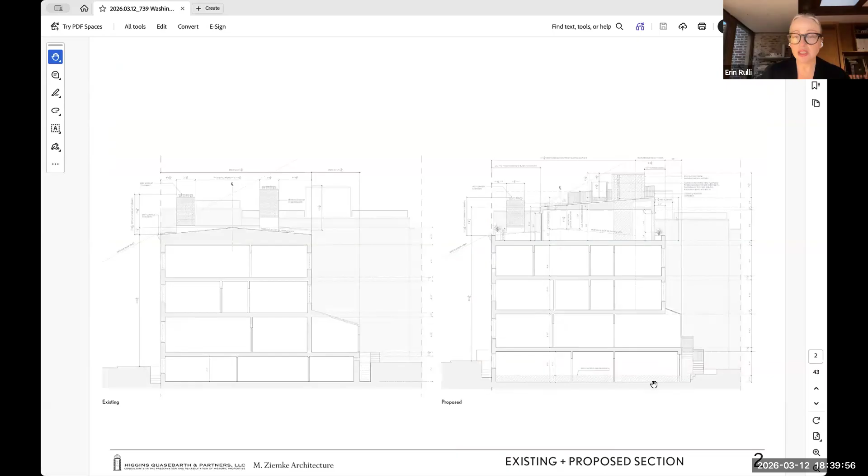And we are looking this evening at the proposed penthouse. There is a stair bulkhead and a mechanical enclosure as well, and rooftop railings, and then a rear yard extension that we're seeing here. There's also a small amount of excavation that includes a combination of underpinning and benching. So here are the context views, just looking down the street. This is, of course, the Whitney ISP currently, and this is 739 Washington. And then looking to the north, 739 is right here.

And I'm guessing, Chenault, that this is what you're talking about, the history of the development of the block. Yeah, do whatever's best there, but it's more an example of what the other things look like in the district. In the district, okay. Yeah.

So the existing house was constructed in 1845. It was one of a row of 4 that we see right here on the corner. And this whole corner was developed by the same owner. That included 129 Bank Street, which is slightly different and a little bit later, in 1855. And as you can see in this diagram and in the map, 739 and 737 were coplanar at the rear. And then because of the angles and the unique conditions in the block, there's a slight jog with the rest of the row.

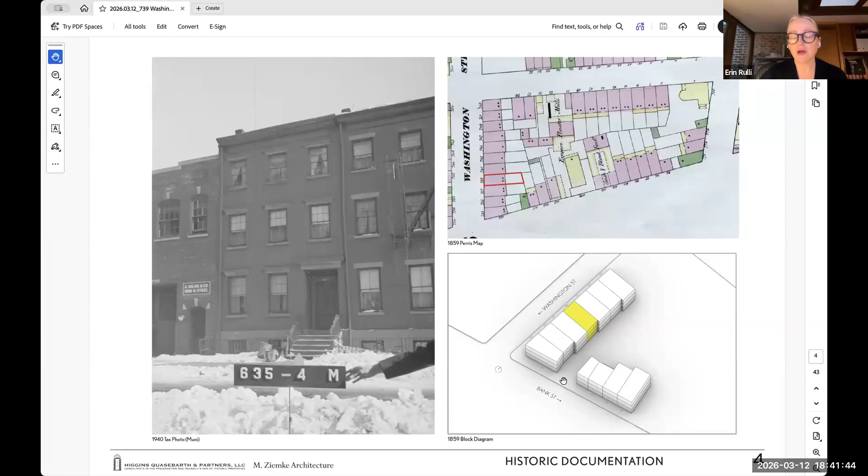And then this is a very typical Far West Village block where you have the mixed use with the row houses along Washington Street, and then the commercial or industrial development in the middle of the block. There was a plaster mill and a window factory in the mid block. So it's an irregular lot pattern and angles to this block specifically. And then there was always historically a break in the Bank Street frontage that afforded some amount of view into the mid block from Bank Street.

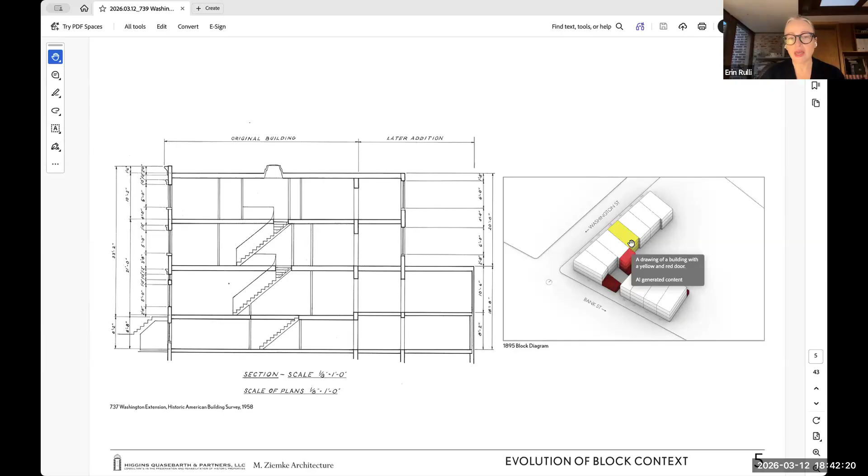Beginning in the mid 19th century, the block began to evolve and has resulted in a very irregular context for this house. The house adjacent to it, which was coplanar as part of its row, received a full height rear extension and two-story extension in the late 19th century, which exists today. And so this red massing is indicating that extension to the sister building to the south.

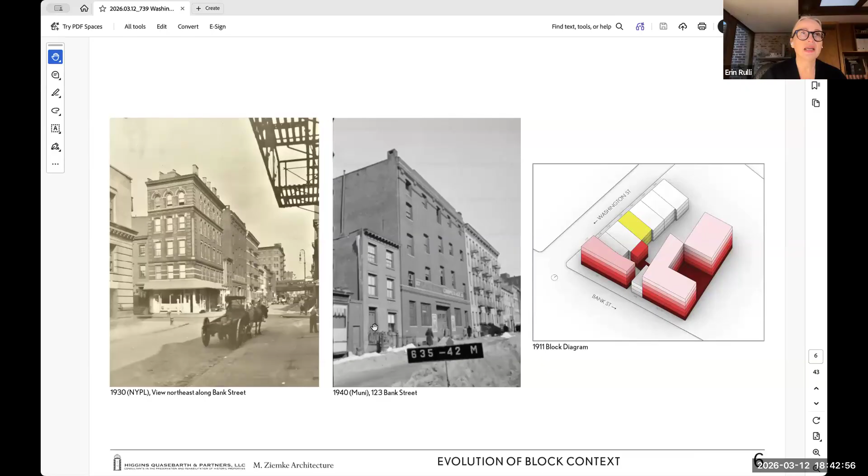And then in the late 19th century, 733 was replaced with a 5-story tenement, which we see here, and closed off some of that connection on Bank Street at that time. And then at 123 Bank Street, this 5-story cooperage was constructed, and you can see the impact of that on that corner block context. This is 129 Bank Street, which was part of that 1845, 1855 development of the corner.

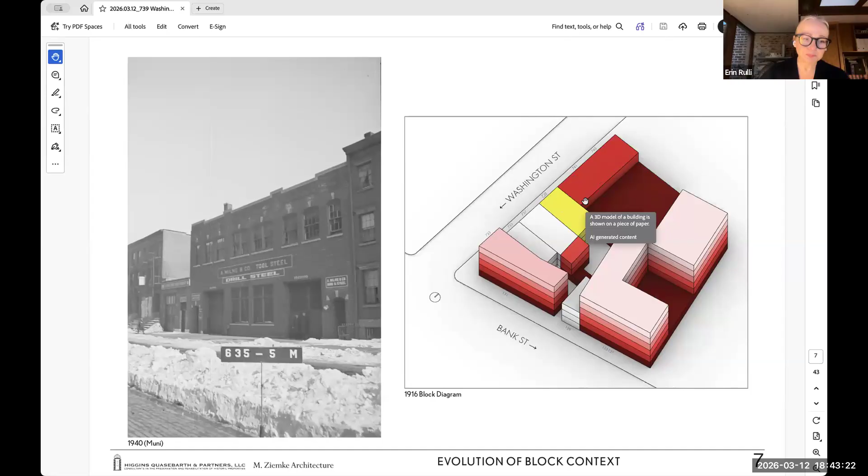And then in 1912, we have the construction of 745 Washington Street, which ends up being the Lichtenstein Studio building. Ultimately, that had a 1-story footprint over the whole lot, and then 2 stories at the front, I'm sorry, along Washington Street in its original construction. And then this is the condition today.

So of course, 745 has had a 3rd-story addition that extends all the way along the west side and along the south. So that entirely closes off the north side of 739. And then 737's full height extension that was 8+ feet that went back on the full height of that building. And that all just sort of locks in 739 between those two buildings.

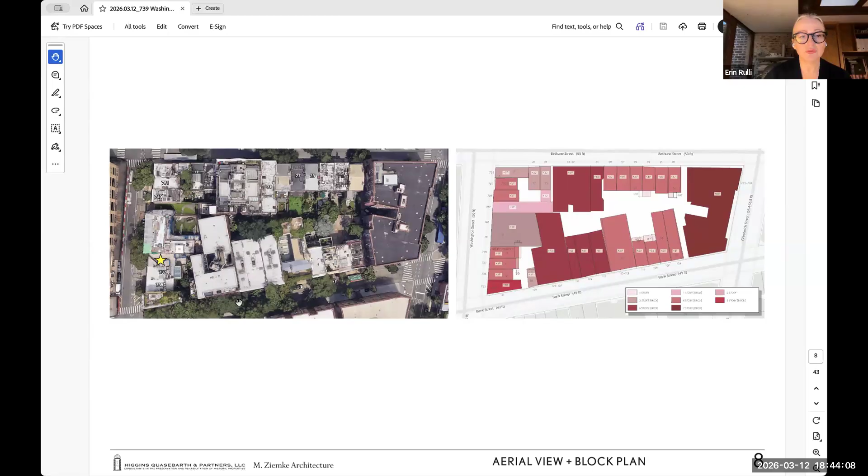And then, of course, the construction of the tenement on the corner. But you can also see just all of the density of construction all around the house itself. This is the existing condition. 739 is here. This 1-story kitchen extension greenhouse structure was added in 1990. We have 737 here, and this is the Whitney ISP building to the right.

Just a few views of the house today, conditions, and another view, 737 to our left, to the south, the existing rear yard, and then to the north, the Whitney ISP building. So the proposed scope of work is penthouse addition. You can see here, so at the rooftop, there's a planter box that goes right behind the cornice, a railing that extends behind that, and that allows us to push back the railing a little bit behind the planter box. The 1-story penthouse with its stair bulkhead and mechanical enclosure.

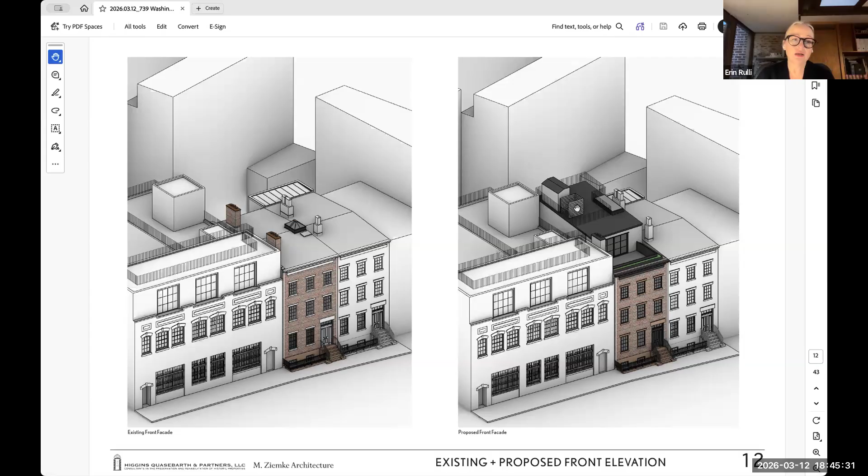So the stair bulkhead is required under code. You can't use a hatch here under current code. So it has to have a stair bulkhead, and mechanicals are required to be enclosed now with screening. So this is all sort of part of existing code requirements as part of the new project.

There's going to be facade restoration that'll all be managed at staff level. We have painting the windows. They'll have a dark finish, black, and the lintels will be restored with the Greek Revival profile. Currently, they're painted white and have been cut back. So they'll get a brownstone finish and their profiles restored, and then masonry repair and brick repointing as needed.

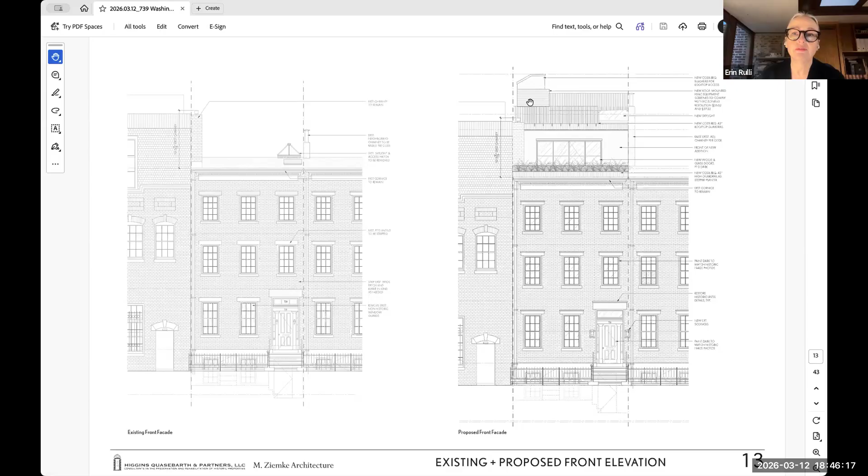Up at the rooftop, those elements that I just mentioned, the railing, the penthouse, and the stair bulkhead and mechanical enclosure. Here's the existing roof section, and then the proposed roof section. So we have the penthouse, it's set back 15 feet from the front facade. You can see the railing here with the integrated planter box. The height above the roof level will be 9'10" for the front of the penthouse. And then as we step back, we have the mechanical enclosure and stair bulkhead here.

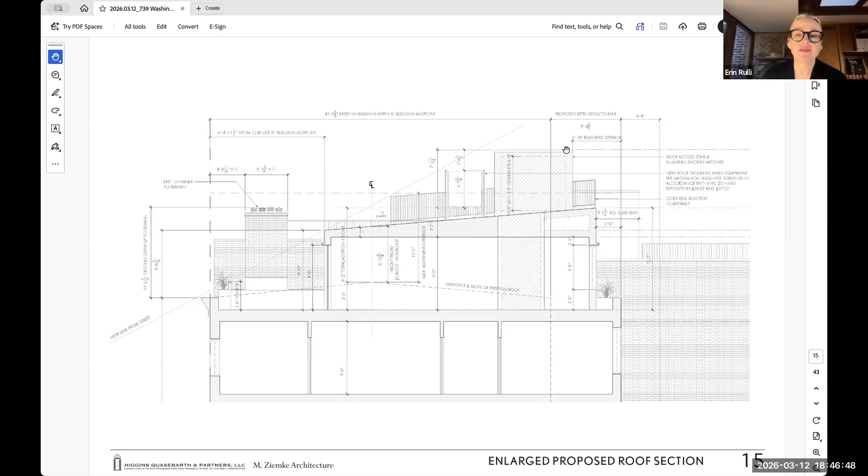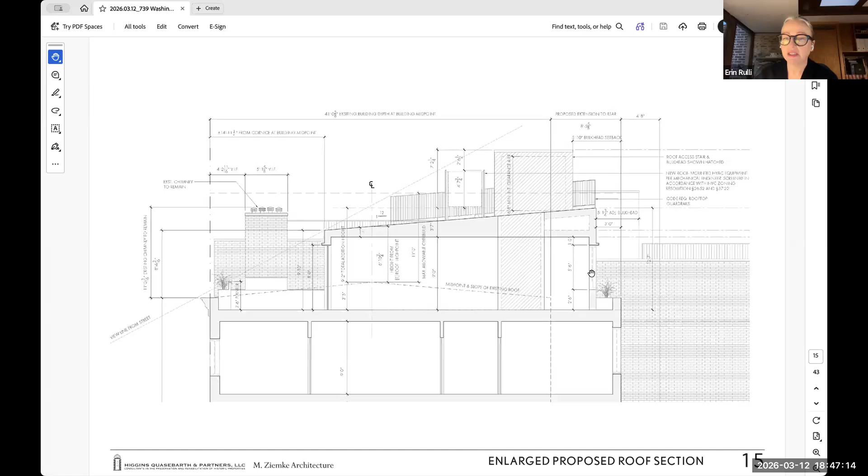At the rear, it's an 8.5-foot extension to match the existing depth of 737. And the penthouse will be set back 3 feet behind the new parapet line. So it's not going to be extending all the way back to the new rear wall. It sets back, and so you get 2 sort of separate readings of the massing elements. Here we see that in plan. So the setback to the front facade of the penthouse at 15 feet, the new mechanical enclosure and stair, and then the new parapet. This is the end of the penthouse, and we'll look at the rear conditions next.

So at the rear, proposed condition is to match the conditions of the existing brick facade and bring it out to the plane of 737. That's again about 8.5 feet, and matching the cornice line and the lintels of the existing building. It'll have all brick with punched openings on the upper 2 floors. The penthouse is set back those 3 feet. It'll have a warm gray stucco finish with sort of a glazed studio window opening. And then we see the mechanical enclosure and bulkhead at the roof level.

Extending out an additional 4 feet from the facade. Is that right? Let me confirm that dimension. Is that right, Marcus? Yeah, 4 feet. Yeah, I got lost in it for a second.

4 feet, this little greenhouse extension, which will then extend down to the basement level. So you can see currently the first floor comes down, steps down to the rear yard grade. 737's yard is excavated down to the basement level. And so we'll be matching that condition and creating a deeper rear yard for that sort of limited space behind the house.

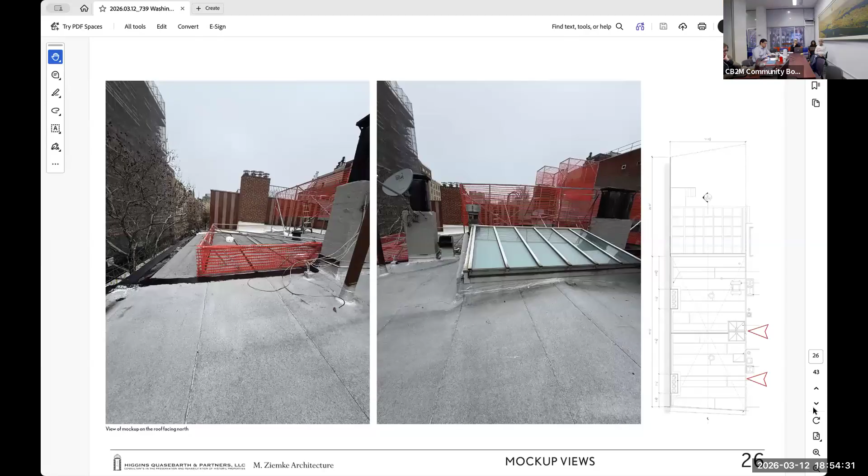So that is it. This is a photo of the reconstructed mock-up. The one you saw earlier was right behind the cornice. It was incorrectly placed, and the wall of the penthouse was 1 foot too close to the front facade. And here's just the material palette, the warm gray of the bulk of the new penthouse, black finish for doors and windows, and the new window installation for the rear facade. And that's it. Happy to answer any questions.

Okay, just a couple to get the notes in order. Is it fair to say that the front facade is intact apart from detailing that you're going to reproduce? Yes. And do we have an answer about the underpinning? Yeah, so it's 51 linear feet on one side and 18 feet on the other.

And if you could go to plate 24. This is from what vantage point? This is from Bank Street. There's a break in Bank Street. North or south of the building then? South of the building. Okay. So all the visibility is the south, and you've just progressed down. Exactly. From south to west to east. Yes, south of the building. Okay. And like everything else.

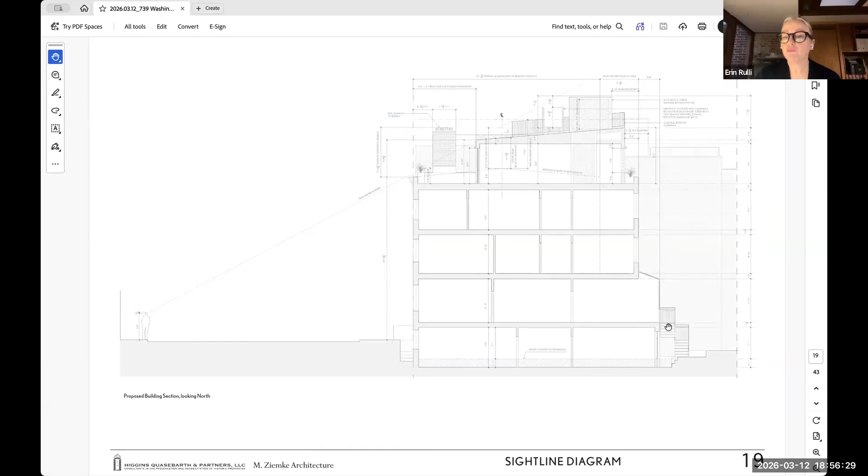At the rear, the garden is to be pretty much as it was, and you're just moving into it with the extension. Yes. So the excavation doesn't extend beyond the house itself? Beyond it does. Let's look at the axon. That's probably the clearest. Yeah, exactly. Just right there. And so how far is the excavation into the garden?

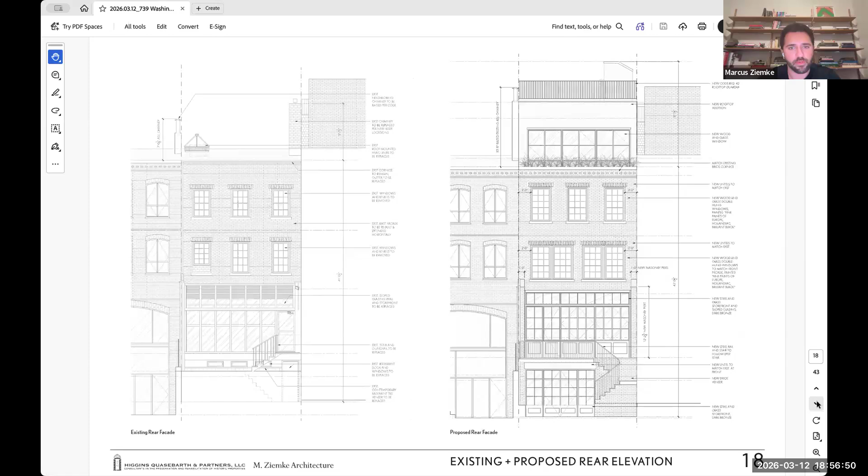That's not on the, I think our section line is cut in a different place. Let's see. And approximately? It's about 3.5 feet. Okay. And then it's 2 steps. It's about 3.5 feet, and then there's a small portion down to the basement doors, which is about 5.5 feet. Which is this, right?

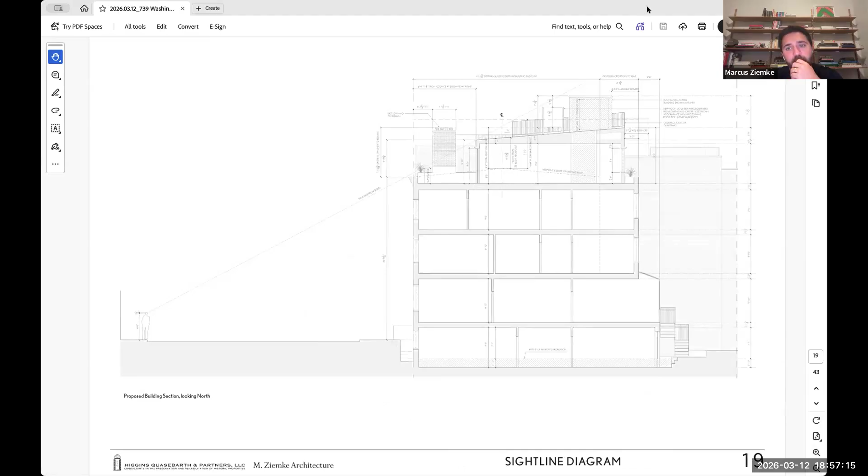And the delicate matter of underpinning doesn't enter into this then. Correct, because of the neighboring property that you can see in that axon. It's existing. We're matching the levels to the south. Okay. And so there's sufficient garden left. That's all. Thank you.

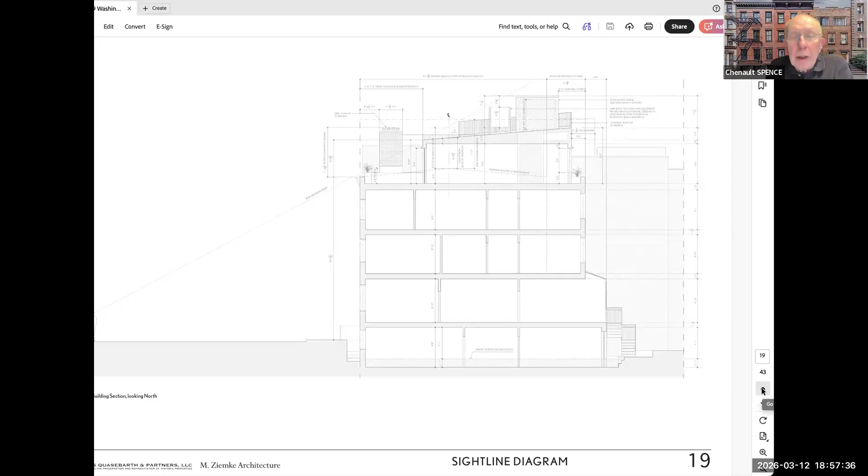We'll go around the committee. Brian? Well, okay, as far as my comments are concerned, certainly from across the street at Westbeth, I did not see much, but as you pointed out, there's a lot of visibility from the south angle. That's a little troublesome, but I think you've worked pretty hard to minimize that. And I'm sure that the planter box at the front will also help to soften that.

Could someone mute who seems to have a dog? Okay. How's that? No, there was some noise on the. Oh, yes, it's outside. Oh, I'm sorry.

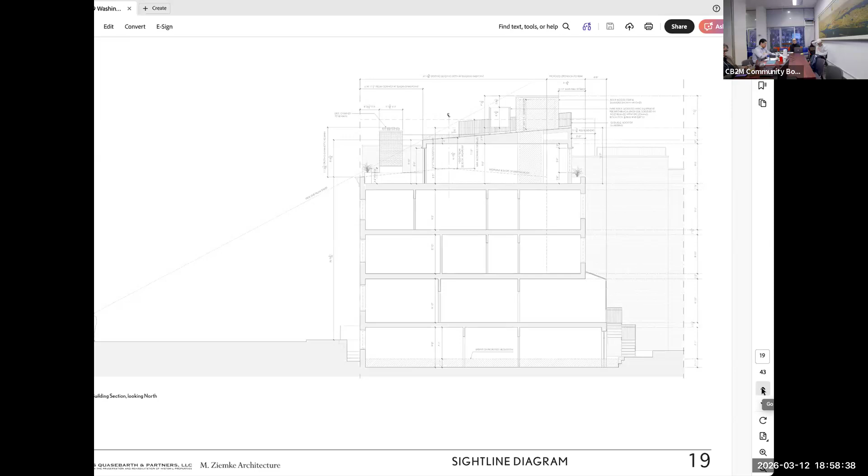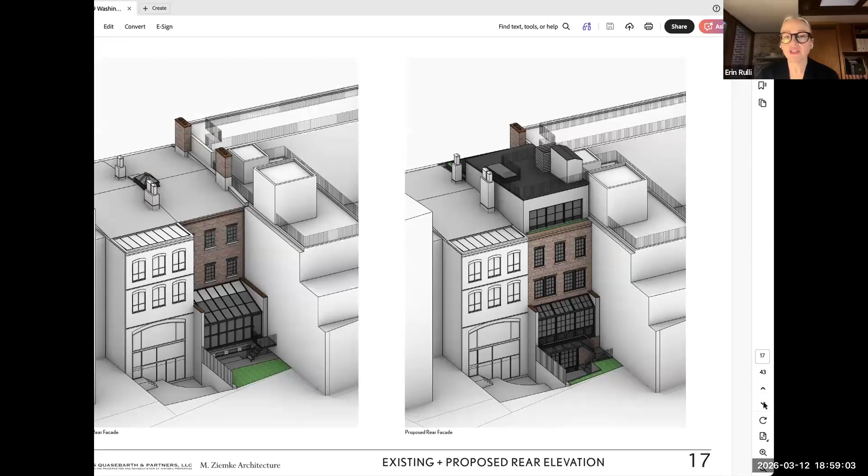Yeah, I guess there is an awful lot of visibility from the south, Bank Street and through that opening in the building. I'm not clear of what the materials are that are going to be visible. I believe you had a rendering of those exposure views. Yes, the penthouse has a gray stucco finish. So that would be kind of this massing. We have a sort of neutral gray stucco finish, and then this is a light gray screening. That's correct, Marcus?

And then the bulkhead is stucco. Yeah. Will be the same gray stucco, yes. So from this vantage point, we're seeing on the left-hand side, the lower section is gray against gray, and the bulkhead section is gray against brick. Yes.

And it's hard to tell in this view, but this bulkhead is on the north side of the addition, because it all gets kind of lost in the orange netting. That is on the north side. There's going to be a break and some differentiation up there in terms of planes, because this is looking from the back. That's this angle here. If it's okay, Brian, does anyone else want to talk about the visibility?

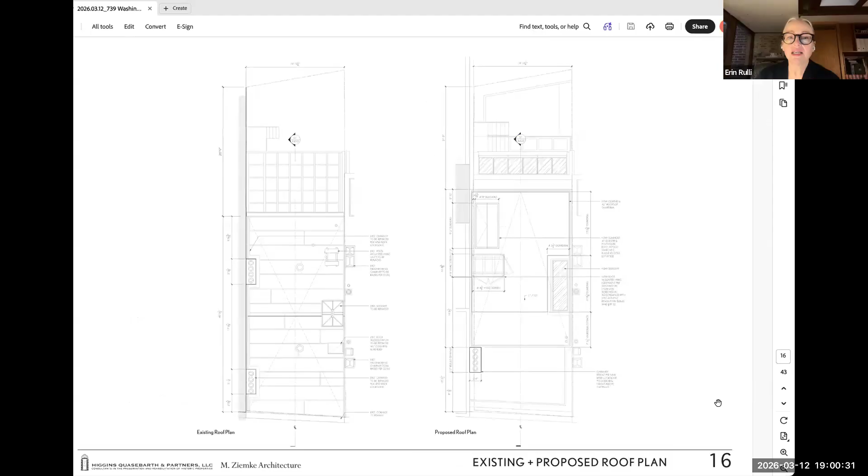Yeah, one question I have, can you remind me why you need the stairway bulkhead? It is a code requirement when it's considered a floor, anything that is more than 1/3 of the floor level below when you put an addition on. They now require you to have a continuous stair all the way up to the roof level, which is considered the roof of the penthouse, not the lower roof.

I don't know if you've seen this recently, but it's something with the new code, and it's been tripping up a lot of people because people think you can do a hatch, and then when they go through the DOB process, they find out they have to do a bulkhead, and they get sent back to landmarks because they didn't incorporate the bulkhead. So you're not allowed to do hatches anymore to the roof? Never, or only when there's an addition? When there's an addition or a substantial project, yes, correct.

Any other questions about that? I would just say that the standard is, in this area and with row houses, not more than minimally visible. Then we take from that, if it is more than minimally visible, to put it crudely, is it offensive? The way it lies, the way against the sky, against other buildings. So we'll consider all of that in determining whether the clearly more than minimally visible addition is as we would recommend.

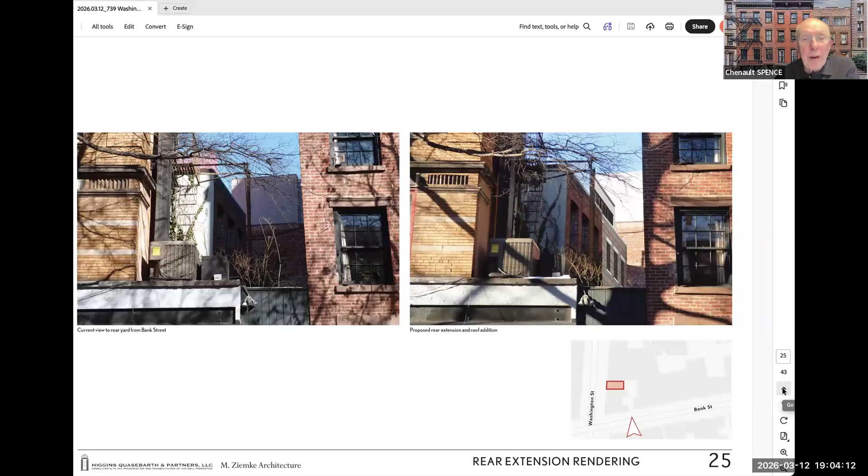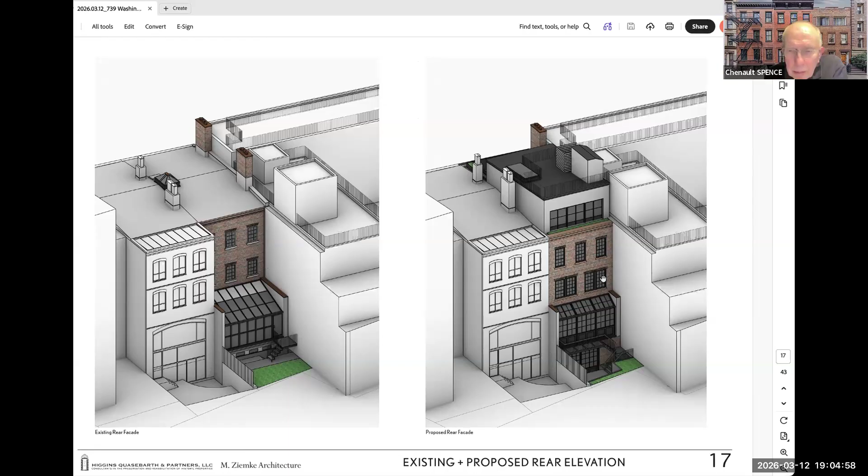Underneath that, are those multi-pane windows the ones that are not historic and shrunk in size? In the existing condition, Chenault, or in the proposed? In the proposed. In the proposed, they're multi-light, yes. And why two pairs? Have you elected not to use the same tripart pattern? It really has to do with interior planning, to be able to create two occupiable rooms there with light and air for those two spaces.

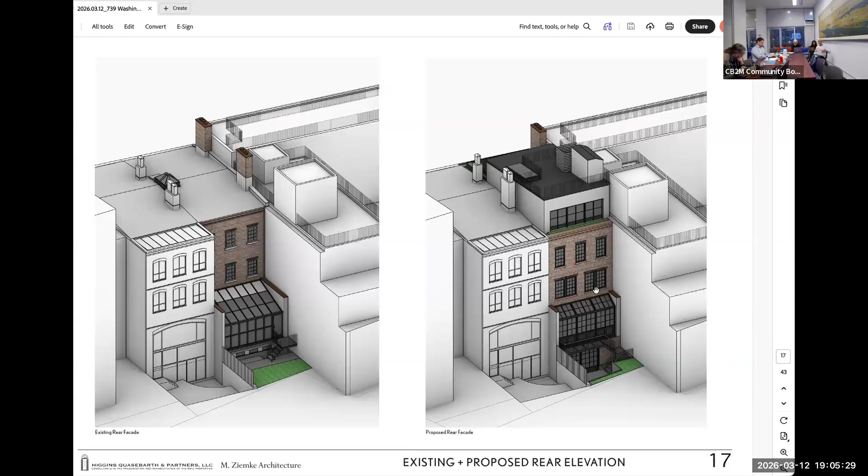Okay. The existing windows, have they been replaced over the years? They have, yes. They're 1990s replacements. But the openings are the same. The openings, yeah, for the most part. There's one where the lintels have been reconstructed. That's very obvious. And then it looks like there used to be a door here, and that's been infilled. I believe they demolished something that was here to build this greenhouse, this extension, and there was a door that used to lead out to the roof of that structure previously.

Not originally, but previously. There's steel casement windows now? In the proposed? Existing. No. These on the brick punched openings, those are wood double-hung. Oh. Yeah. And these are aluminum, not good construction. In a very technical term. Yeah. Is that all the questions?

Okay, and are there members of the public who wish to speak? Are there board members here? I don't see any. Okay. I have a question, actually. It's really not to do with the landmarks. Why are you bothering to excavate down to the cellar level? You're going to be losing backyard. Yeah, the priority for the client here is trying to get more light down to the basement rooms. They're going to be occupiable spaces, so they want to make them feel as comfortable as possible. So that's about maximizing natural light and access. Okay, thanks.

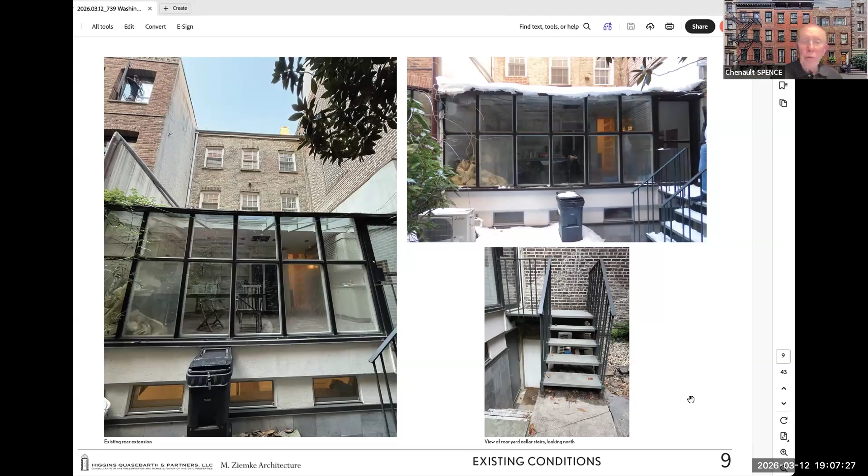Okay, thank you, and thank you, everyone. We'll move on to the next application. Thank you. Brian or Eugene, whoever's managing it now, it's on for 739 Washington Street, if you would bring up the people. We're closing up 739 Washington and going to 60 Bank Street. I'm sorry, I'm rereading this. Bank Street then. Yes, so could the presenters for Bank Street raise their hand and I'll elevate you to present, okay? With Edward Bowser.

Okay, the application is for 60 Bank Street to restore the front facade, construct a small rooftop addition, rebuild an existing rear yard extension with new windows patterns, and excavate the rear yard.

Where's the share? Okay. Oh, let me ask you again. I said it, I think, when you were not on, perhaps. There are a number of pages that have small, sort of like that one. And if you have something particular to show, just enlarge the one you're speaking of. There seemed to be an enormous number of comparisons in the district, and just be selective with maybe a few of any one topic. Sure. We know the district well and generally what fits with what houses, so it'll be okay. Thank you. Can you hear? You guys can hear me?

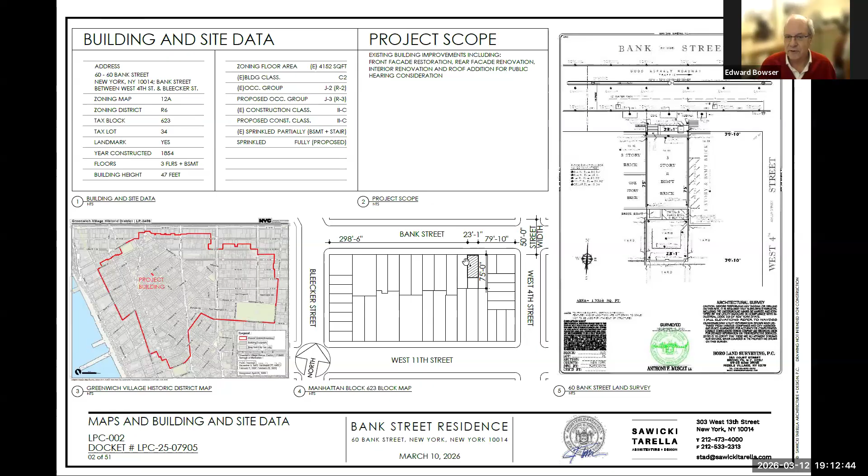I think we'll try the next slide just to see. So this is the district. This is the lot, and this is where it is on Bank Street. It's between West 4th and Bleecker, closer to West 4th on the south side of the street. And the building directly to our east was already fully renovated, and many buildings on this block have been renovated extensively. Let's go to the next.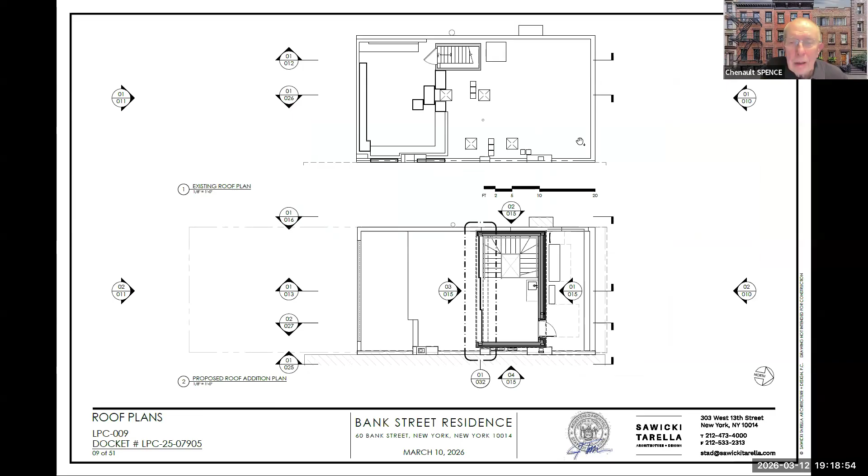Have we seen a representation of the rooftop addition? Did I miss it altogether? As far as what it is? We just showed you a plan, right? We went over that. So, I mean, what does it look like? Oh, it's a box, and it's clad in standing seam zinc. But you don't have a rendering or anything of it, or an elevation? Well, this is the front elevation of it. And is that solid? It's mostly solid. Is that a full window wall we're seeing?

It's got a door coming out for servicing air conditioning. And is that a window, a full height window? I can't tell what we're seeing. No, it's just a door. It's just a service door. Is there no window in the front? No, not facing towards the street. No, the windows strictly face the back. I can't figure out from that. Just a moment. Let me get these, and then Sean.

The excavation, yes. Is there excavation under the house itself? Want me to go to the section? There is some clearing of different levels of existing floor in the cellar that we're hoping to level out, and we have a little bit of underpinning to do. Okay, let's start with the excavation. How deep is the excavation below the house? Below the house is 2 feet. Anything interior to the house? Oh, about 2 feet.

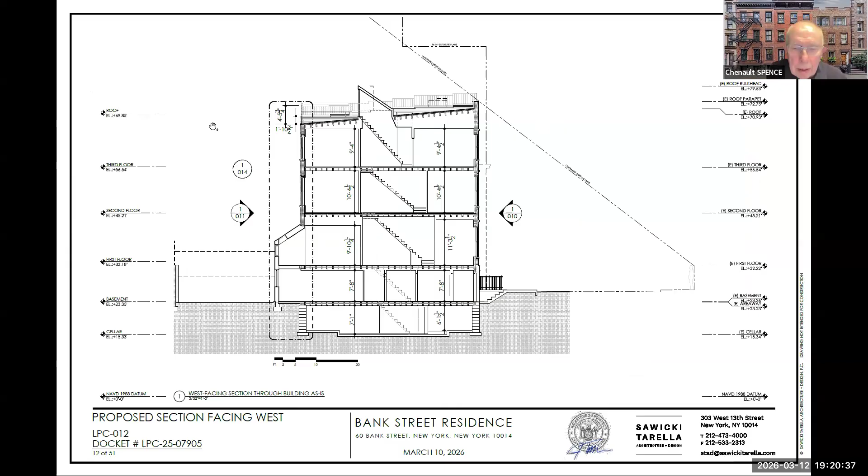We go to a section. And can you show us on a plan the underpinning? Yes, sure, where it is. Here we go. So on the west wall, where the elevator and this area are, it's about 15 feet of underpinning in the mid wall. And in the rear, on this wall, about 10 feet of underpinning.

And is that all adjacent to an existing structure next door? Yes. And this excavation extends under the extension. Yes. And then how far beyond the extension into the garden is the underpinning and the excavation? The extension is about 6 feet beyond the back of the original building, and that's as far as we're going.

And you mentioned excavation under the garden. Yes, this white box here in the back. What are the dimensions of it? That's about 18 feet square. So how far into the garden? About 18 feet beyond the existing footprint. Oh, so it's 18 by 18. Yeah, the plot is 23. Oh, so it's just short. We're inboard a few feet on each side and 5 feet in the back.

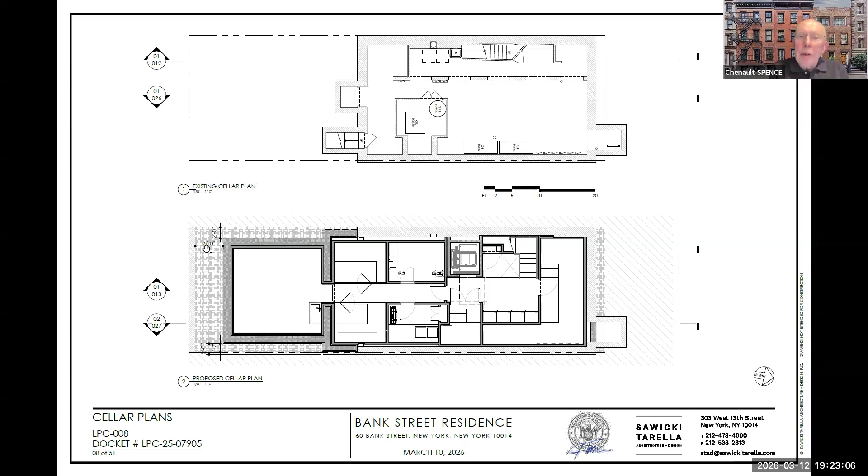Oh, you mentioned particularly the gate. Is that something for us to speak of that staff didn't do? The staff wants us to present it at public hearing. They were not willing to give us the gate at staff level. I'm sorry, it is or is not something for us to speak about? It is. I wanted to mention it to you in case there is some concern at the community board level as well. Okay. We routinely see this, usually for a ramp, so I don't think that is a question, but we'll discuss it. Okay, are there questions from the committee?

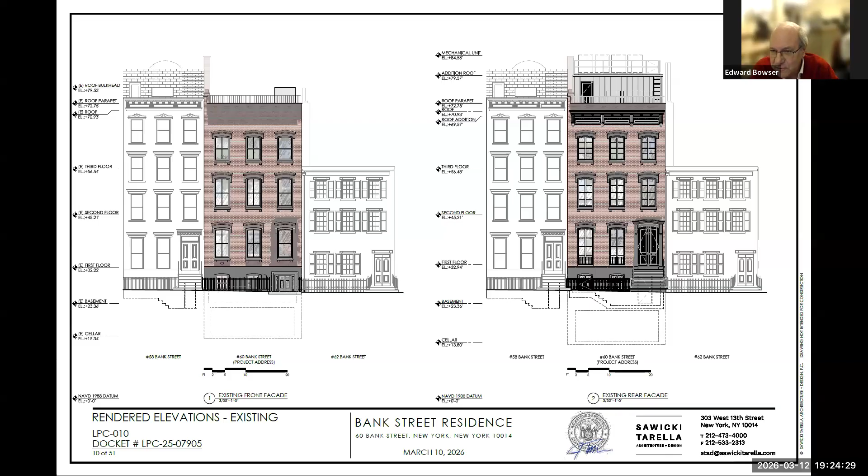Oh, lots. Go ahead, Arturo is going to start. Maybe this is mislabeled, or maybe I'm misunderstanding. On this page it says existing front facade and existing rear facade. Are those the correct labels, or is it the proposed front facade? Oh, it's the proposed. We've been shuffling the pages so much with landmarks in the last week that the label got missed. It's good that you caught it because we'd like to fix it. This is the proposed new facade. And same thing for the next page, I think you also mislabeled rear. Yes, this is the existing rear facade, and this is the proposed rear facade. Okay, thank you for the clarification.

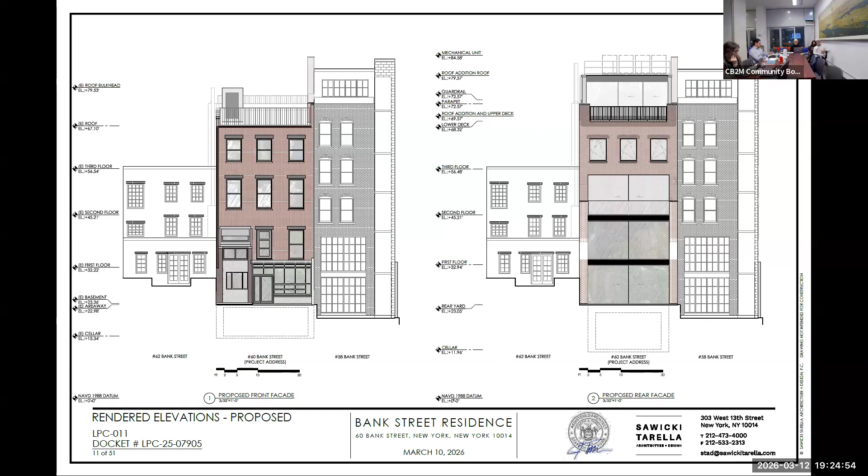No problem. Okay, so I would like to ask if we have some documentation about where the cornice is on the original building, because the proposed cornice on the front facade just seems out of place. So what went into the decision to put the cornice where it is on your rendering? Well, we placed it relative to the photo, at the level relative to the windows where it was originally, rather than all the way at the top, which would have left us with a much larger gap between the window and the cornice.

And we thought it better to not cut the top off, because there's a steeply sloping roof, which we are not interfering with. We'll show you that in section. But starting where the facade was, this was the original brick, it kind of ends somewhere in that area. And that was where we thought was the best place to place the cornice.

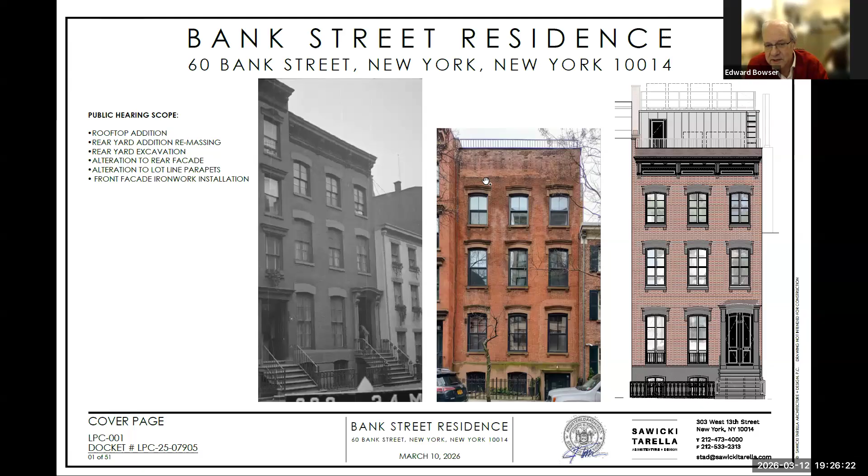Okay, so you're saying that you don't have any better photographs than the one you're showing to give us a better indication of the true extent of the original cornice? No, we have all the photos. Maybe the next one. We have all the historic pictures of the building that we've been able to find. These up here at the top, but you really can't see much more, and it's dark.

Okay. Is there a stoop gate as part of this presentation? Yes. Oh, wait, it's stoop gate? Oh, no. Wait, you mean on the stoop? Yes. No. All right, thank you. Then,

I'm just going to offer something to you: the visibility is so great for this addition on the roof. And it's partly because you've chosen to do a relatively small room running all the way across the building, as opposed to maybe that same footprint over on the other side of the building, so it's not so much sticking out like a sore thumb.

And so since you have already indicated to us that the interior is totally reworked, I'm assuming that locating the stairway is something that was within your purview. So I would say, have you considered that addition being less visible?

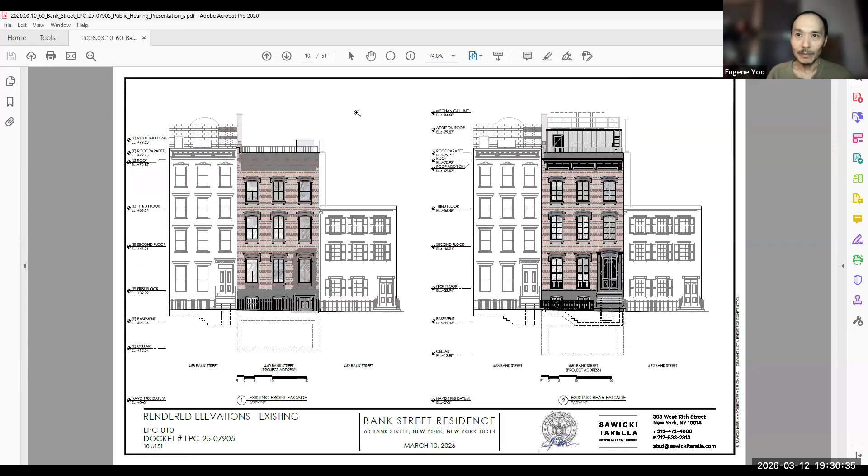Chenault, I have some questions. So if you could go back to the front elevation, I don't know if I missed this, but did you describe the windows? It looks like the windows are much different in the existing and the proposed. Is that part of the application before us? Well, not really. The windows that are currently existing are replacement windows that were done in maybe the 60s or 70s. The windows we're proposing are as close to what was in the historic photos as we can determine so far. We've been going through the profiles and the brick molds and everything else with Landmarks, and they seem satisfied with what we're providing.

And I'm just very curious, since you have this on the next slide, I realize this is invisible from the street, but what exactly is going on with the windows in the rear? Well, the rear is quite a mess, but that's a different question. The interior of the building has been redesigned by a pretty famous Italian designer, in sort of a mid-century modern world, and their intention was to carry that out to the back of the building as much as possible.

Do you want to have your question, Chenault, or? Yeah, go ahead. Oh, okay. My two other questions were, one, do you have any pictures of the mock-up, or is it just that one photograph very early in the presentation? No, we have pictures of it. You mean like up where it is, as opposed to seeing it from the street? Sure. Yes. Yeah, I think they're in the appendix. Okay. Yeah, but of course.

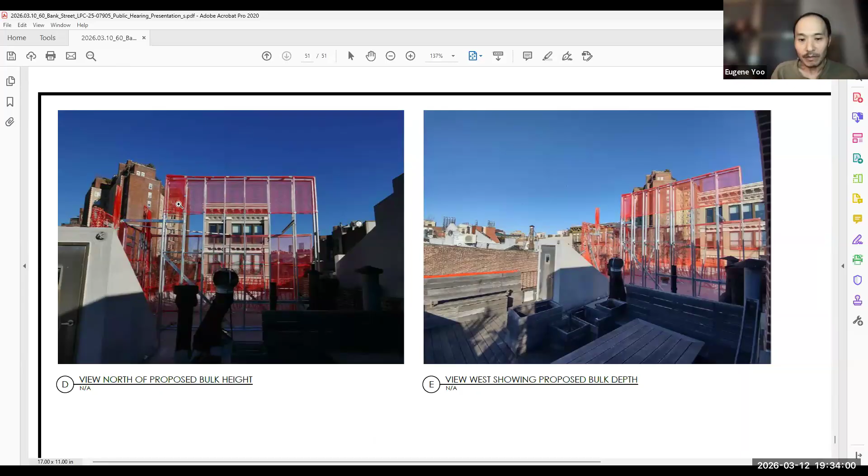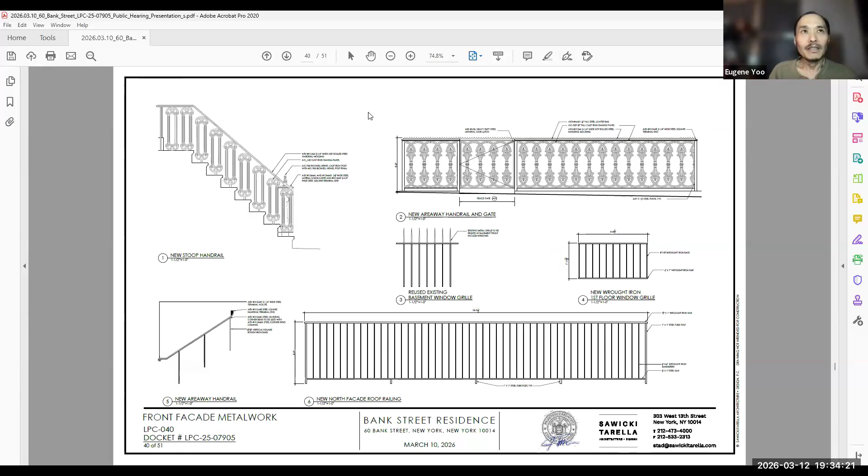Yeah. So this is what we built. We built only the two walls that you can see from the street. So this is the front wall, and coming back, this is the side wall. And the higher piece on top is actually a representation of some of the air conditioning units that are going to be on top of the pop-up. The mechanicals? Yeah. Okay. And regarding the gate, or I guess the front of the building, are there any details of the proposed changes to the gate? This is the panel. It's just a little hard to tell from the one photograph that is in there. Yeah, this is close up more of what we're proposing.

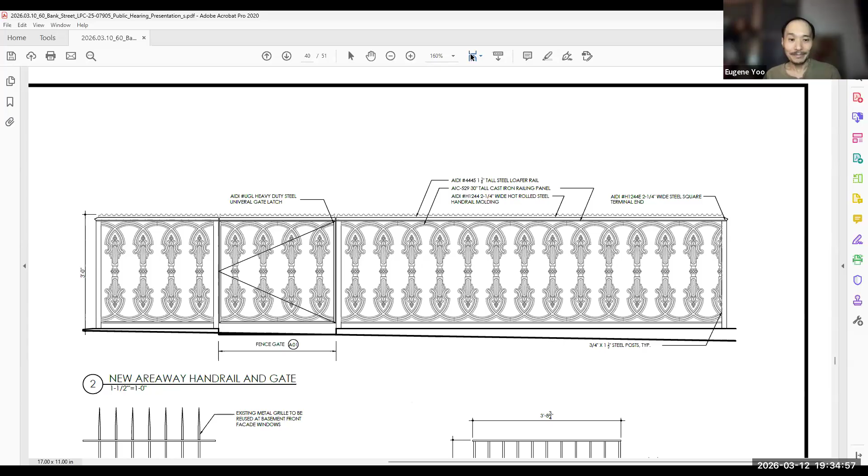Are there similar ones in the neighborhood or with similar buildings? This attached photo. Yes, they're both similar to other ones in the neighborhood, and as close as we could find to matching the tax photo of the actual original pattern. Are you finished, Eugene? I am. Thank you, Chenault. Could you go back to the rear elevation? I'm sorry, I should wait. Are there other members of the committee that want to ask questions? Well, I just want to ask if there's a photo of the existing rear facade. Yes.

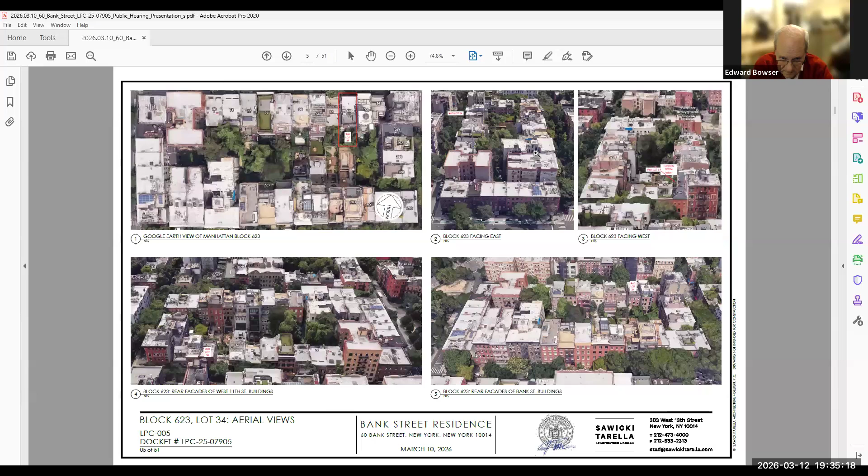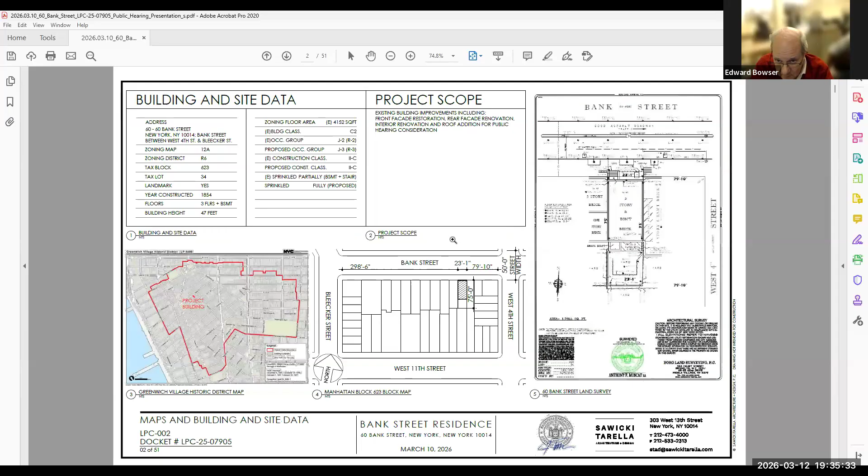Okay. Yes, I think there's a better photo here. The photo. Isn't that it? Yes. That's what the rear facade looks like right now. Number 5. Do you want to say something about it? What do you think, Bo? So that's an extension on the ground level, right? Correct. Two levels, actually.

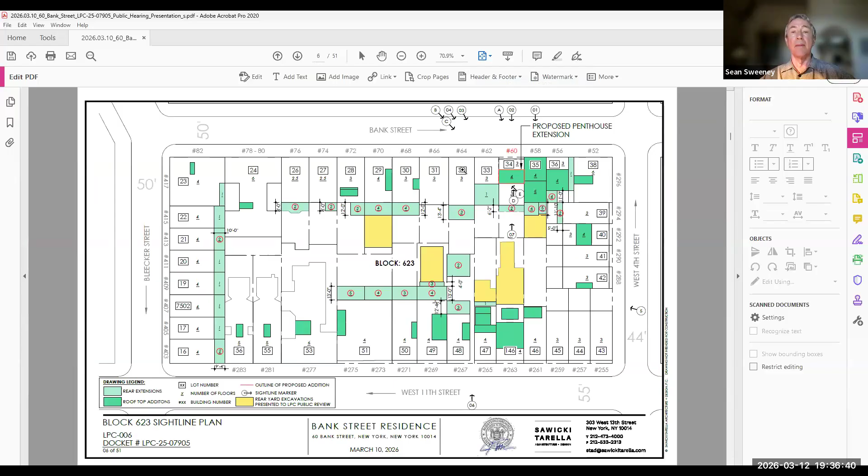Other questions? Yeah. It looks like in the proposal, you're going to have more panes or lights of windows on the front facade than existing. I think there were 4, and now you're going to have 8 per window. Why are you doing that? That was requested by Landmarks to match the tax photo. Okay.

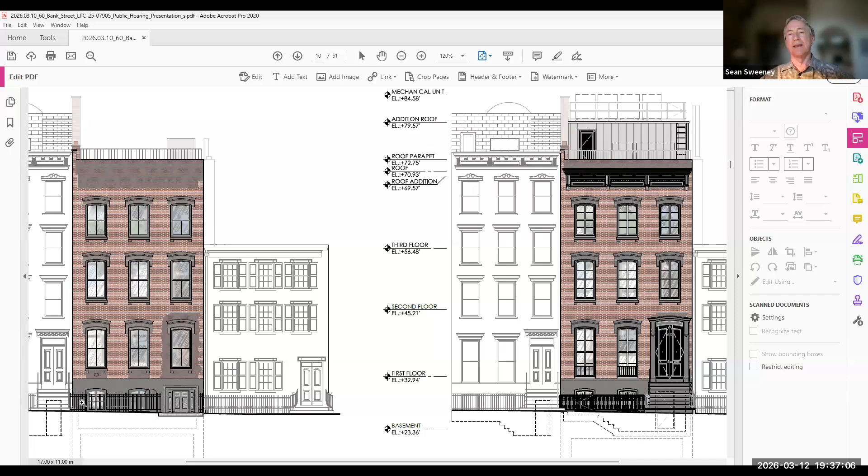I think our clients would prefer the other one as well. I agree with you. Just because the tax photo has it doesn't mean it's historical. Doesn't look very historical. True. Well, the staff are approving this based on the historical material. Also in 1850, the technology to make bigger panes of glass probably didn't exist. So it's conceivable they were smaller panes.

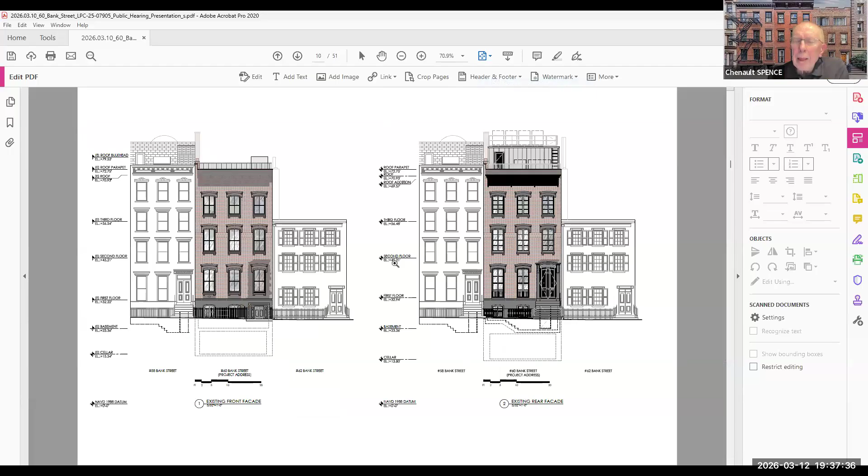Okay, could you go back to the photograph of the rear facade that you showed? Now, we're looking at the original back wall and the original window openings, and the windows, of course, are going to be replaced. And what are we seeing underneath the leaves? It sort of gets vague. There's doors that have been cut into a balcony. There's replacement bricks, stucco. So that's been considerably altered, but the two floors above have not been altered then. They have not. So there's a lot of original material coming out in order to make these windows.

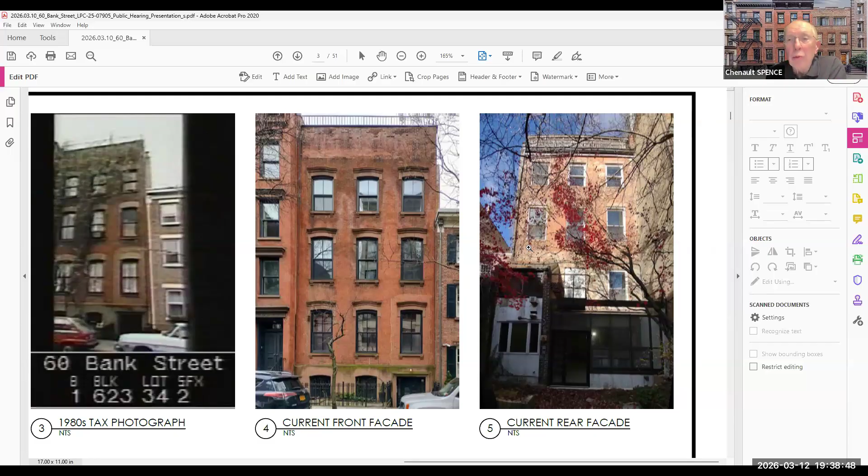If you go to the rendering, please. Yes. We'd like to save some of those bricks because several of the walls have really some structural problems that we're going to need to fix both on the side and up above. Okay.

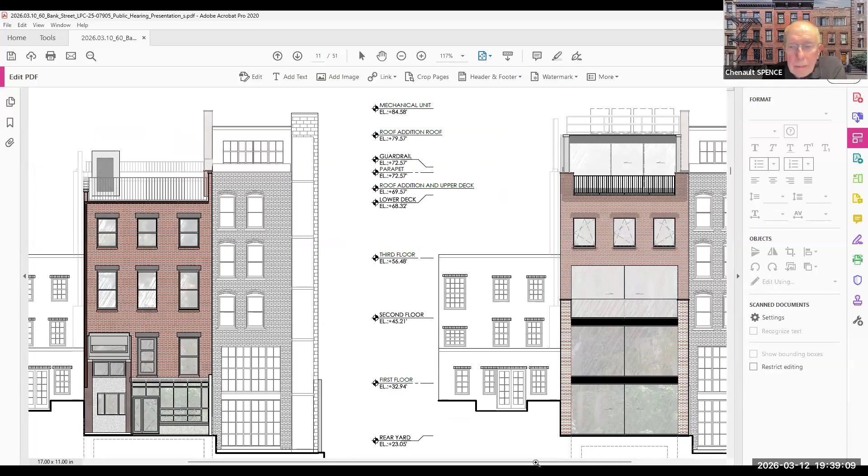Now, it's hard to know exactly what we're looking at here. Is this really just plain glass, as ultra modern as it looks? Yeah, those are sliding. The bottom one is a slider. The top one is fixed, and that one is a slider. So that's pretty much half the width of the house, a piece of glass sliding. Yes. And the only distinction is the edge of the glass itself. Yes. Okay.

Eugene, are you able to show these in the business session? I have the presentation that was sent to us, so yeah, we can bring this back up in the business session. Okay, good. Fine. Are there any other questions?

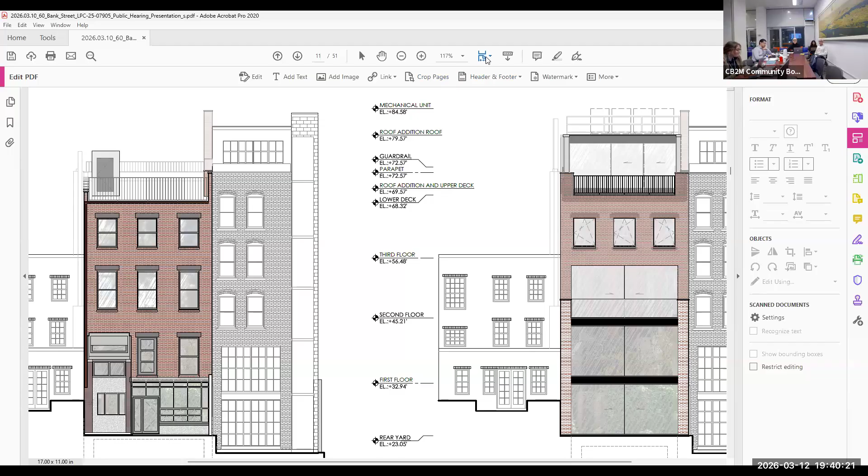Yes, this is Brian, and I do have one other clarification in case the presenter is not here during our business session. I noticed that in the details and on your floor plans, there's quite a bit of steel in the floors, so probably for getting a stronger structure for your floors. And the stair is totally reconstructed. It's not in the original place of the original stair.

Correct. The stair that's in there now is not the original stair either. It was installed when that was converted to a multiple dwelling. Okay. All right, so I'm going to be arguing for other solutions that will keep the addition on the roof from being so visible. So I just had to clarify that.

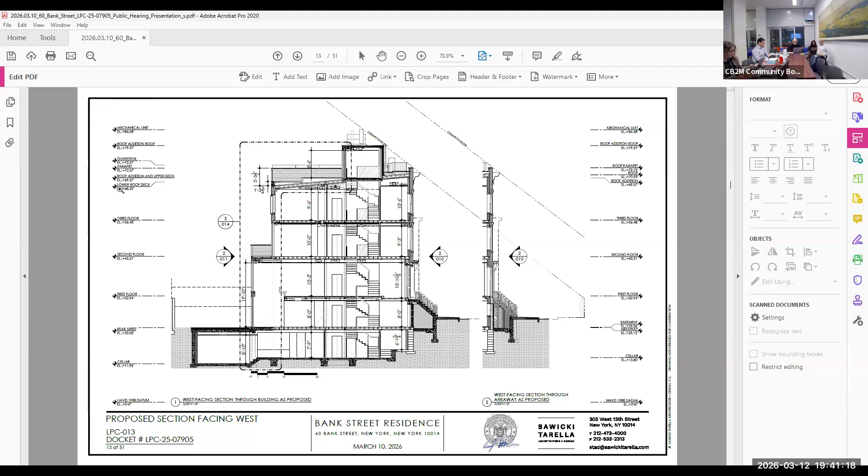Sure. I have a question, Chenault. So there had been 8 tenants there. Do you know how many will be there now? Will this be a one-family house? One family house. Thank you.

I'd like to say something about the rear facade. The commission, in the olden days, seemed not so concerned with it. Now they're treating their view of the rear facade equally to the front as part of the house and the way the house looks. So while this visible from a thoroughfare theory has to do with rooftop additions, the fact that the rear facade is not visible except within the donut doesn't discount it from being carefully considered.

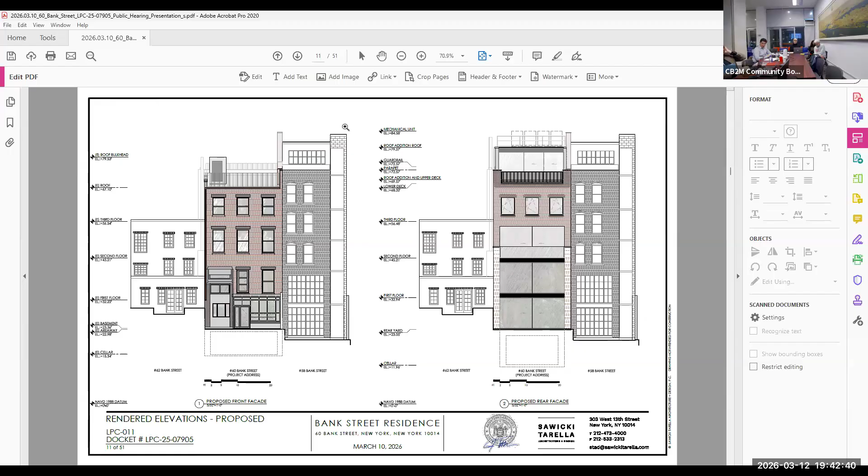Are there any other questions? Any public questions? None? Okay. Thank you. Dina has her hand raised from Village. Let me promote you. Okay, Brian, if you'll please return everyone to the proper spot. You're able to do that, Arturo? Yeah, I can do that. I just promoted Dina. Dina's joining to ask her question. Hello. Sorry, you had given me audio access before and then I lost it. My fault. Thank you for promoting me.

I just wanted to share 2 quick things about this presentation. One is just for clarity, because I noticed that the LPC agenda is up for this item. It was helpful to me to understand exactly which parts are under your and our review. On the agenda, it says the application is to construct rooftop and rear yard additions, excavate the rear yard, alter the rear facade and lot line parapets, and install ironwork. And I think the ironwork is that front gate situation. So anyway, just wanted to clarify that.

And one other thing quickly, some of the committee members touched on this already, but for the applicant to know if they're still listening, I think it would be very helpful to really understand the impact of the visibility if a rendering, possibly an axonometric rendering, could be included of the rooftop addition in the materiality that it's going to be, because we can see that it's quite visible from that side view, but it's hard to grasp what that's going to feel like within the streetscape without a rendered view.

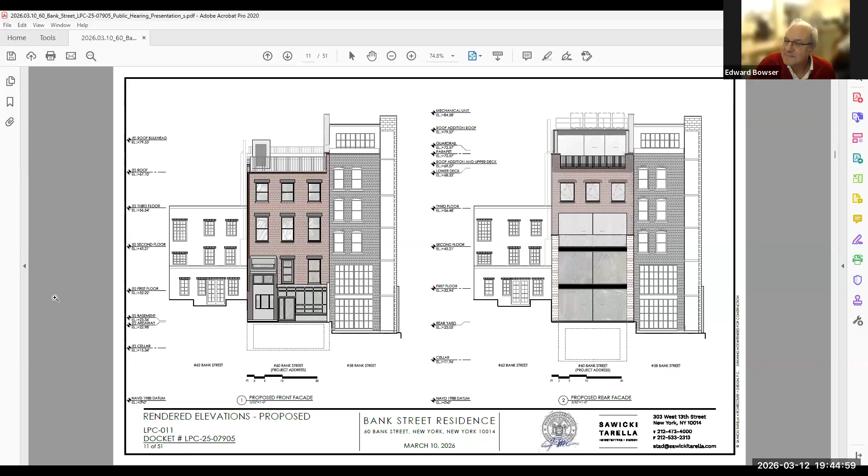Is there anyone anywhere who wishes to speak? Okay, thank you. And if you'll take down your screen share. Okay. Thank you very much.

I think it'll be easy. The first report is the position paper. This will go to the board at its regular meeting. We'll just send it as what we recommend. It's not a letter, which is what we're normally doing, but rather something to be distributed or amplified or whatever will be done with it. It's something that goes beyond landmarks. I think we'll just pass it along and the board will decide what to do. So have you read it from the distribution?

Are you asking whether we've read it in this? Yeah, I mean, the question before us is to send it along as it's been proposed by Susan. For those who weren't here, Susan was to write this. And I reviewed it with her at the request of Village Preservation, and we took it on as a project to do, and they gave a presentation about the need for it and the urgency, particularly.

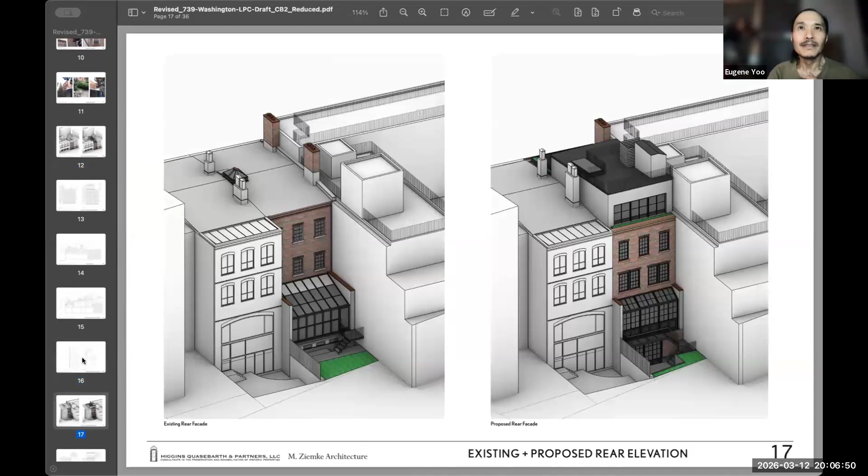Well, which slide in the deck? 16 maybe? No. It's a photograph of the mock-up, whatever it is. Yeah, okay, it's 21 from the front and 22 from the back. Okay, so here's 21. Right, and there's 22, right? So should we start at 21?

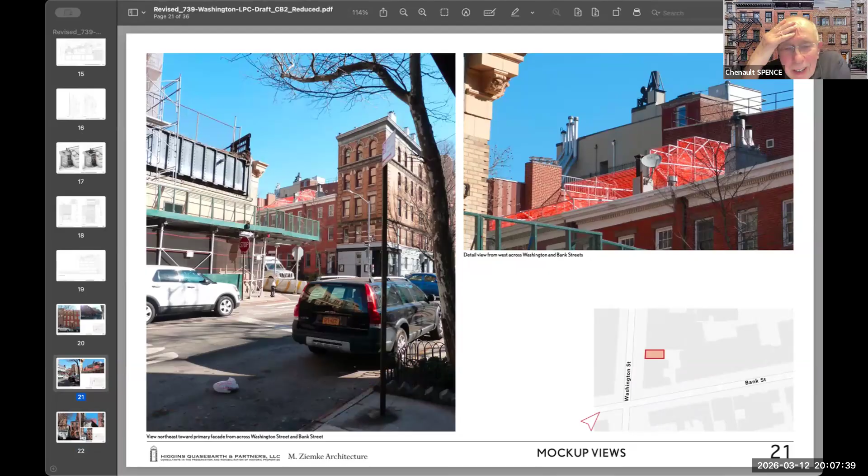Mm-hmm. Yeah, that's quite a bit of mass up there. And am I correct? We're seeing all of it that there is. How would it be less visible, particularly looking at the other slide as well? It would have to be reduced in size. It would be set further back from the front. Okay, then show the next slide. I think it's the next one. Yeah. And all of that bulkhead would be eliminated.

Well, I'm sorry, there's one that shows it against the side of the industrial building. Is it the next one? All right. I'm sure that it shows the entire depth of the... If I recall, wasn't this the one where they had said that their mock-up had changed? It's a picture of the mock-up, I know that. Yeah, and I think the picture of the mock-up had changed. They're actually still in the meeting. So I see that Erin just raised her hand. And it was up when I asked her about the color of the material. All right.

Do we have a question for Erin? Chenault or Eugene, do we have a question for Erin to answer about the bulkhead or the size of the penthouse? Well, I'd like to see what we're talking about. Are you at the end, Eugene? I mean, I can advance several slides. Yeah, these are the last several slides. Okay, then back up and it's bound to be there. Right.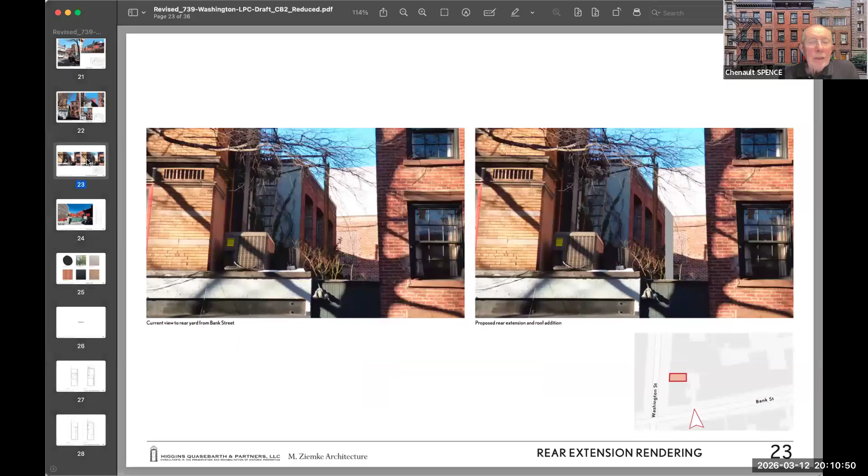Well, my position is I don't think it can be reduced enough in either direction to satisfy the real problem of total visibility, simply because there's a hole there. You can see through the hole of the roof. And it's not some far off place. So I think Bo was right simply to recommend denial because of the visibility. I understand, Brian, we would see less of it, but we would see the whole of the less of it. Oh, well, that's right. We don't redesign it for them. Right, we're just talking about what might happen. So yeah, I think our only recourse is to say no, it's too visible, and to say the reason for it. Yeah.

And if anything built on the rooftop is visible, it's visible. So is everyone agreed that we recommend denial and be very clear about why? Yes. And nothing else is objectionable about the application, right? Correct. Right. No objections online, so. Okay, very good.

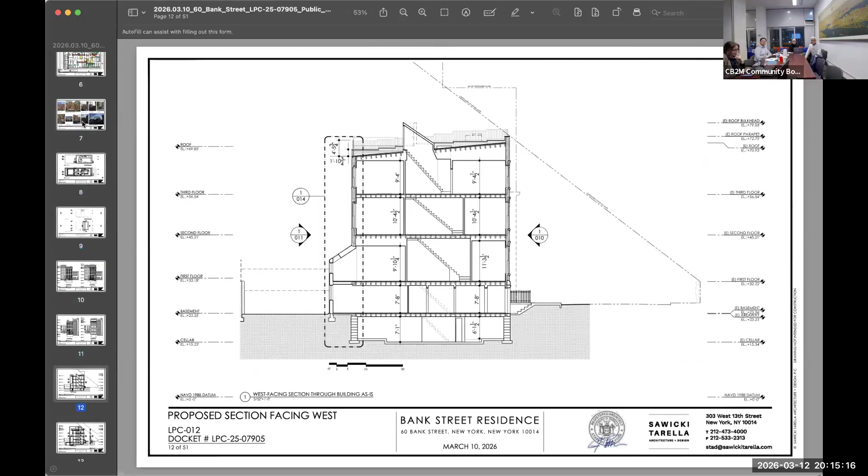Did anyone have any objections? I want to talk about the rear facade. Eugene, if you'd be good enough to put up the rear facade. Sure thing. The elevation. Okay, so the rear. It's 11, the one that Brian showed clearly, that plate. There it is. There we are. This is really what I think we have to comment on. Yeah.

We have never seen anything approaching this. There are often things that are this wide. They don't extend beyond the parlor floor, which would be the floor between the two dark black lines, if I'm reading it correctly. And they have some articulation or division that makes them look like they could belong to a house. Can I just say something for Arturo's benefit? Normally, if there's a rooftop addition, you see on the back there, look at the existing on the left. If we allow the rooftop addition, we would expect that the next two floors would be essentially the same, and then something else maybe as you get down lower, especially the basement. So what Chenault was saying is, this is far exceeding what we normally approve. Very far.

And with respect to the design of the windows, and the fact that they're not windows but sliders, a thrown-out back wall replaced with glass. And all the others we've had, hinted at in the house next door, are some kind of full-width windows. They are respecting the sizes of the original. And for Beau's favorite activity, the original material is completely removed from the next to the top floor. And the top floor windows are, as far as I can see, also plate glass. Casement. It's too much. Single pane of glass, right? Whatever they are, they don't recall the history. And the commission was very specific about that at their meeting this week.

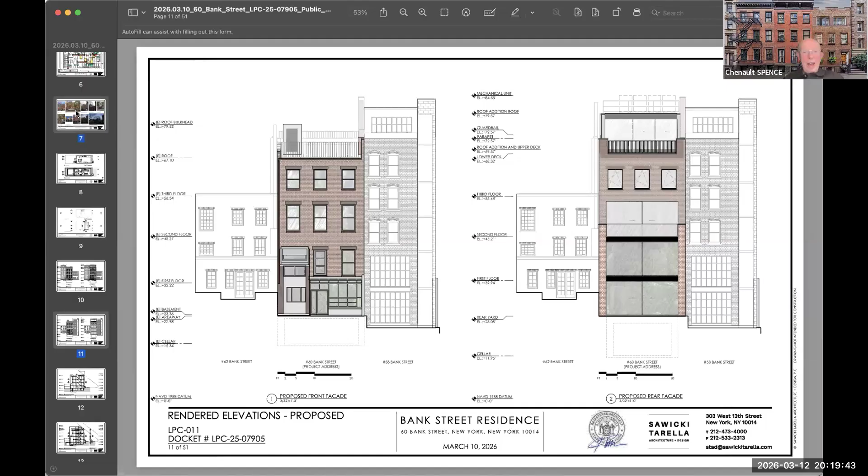Does anything else require comment in the house? Oh, of course. The penthouse. Oh dear. Visibility, right? I'm so focused on the bottom, I can't even see the penthouse. It should similarly have some sense of windows. We have glass wall penthouses, but they're walls of windows, not walls of glass. I think that's where they've stepped over the line of what we would like to see. And unfortunately, the penthouse is so very visible from the street. Okay, that's the next one. I want to get the house out of the way. Just a small detail.

I don't see anything that qualifies it. No. And it's so clear that with the stairs moved, the part of the vernacular on the roof is bulkheads wherever they might lie. Often staircases are closer to the front than even this one. But a bulkhead is one of those things that you blank out, but you don't blank out rooftop additions. It's kind of a psychological statement. And almost every house has one if they don't have a hatch. So is it just simply denying it and not trying to redesign it?

That's what I would do. Yes, I would agree with that. Yeah, I would have to agree. Then no objection to denying it. Okay, after a lot of good conversation, we've come up with the rear facade and the penthouse. The rear facade and the visibility are the two items to find objection to, correct? Yes. Yes. Okay. Is there anything else?

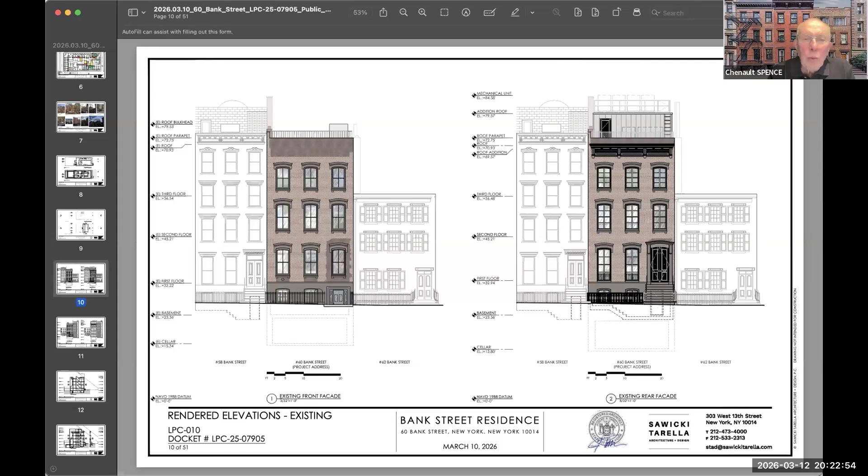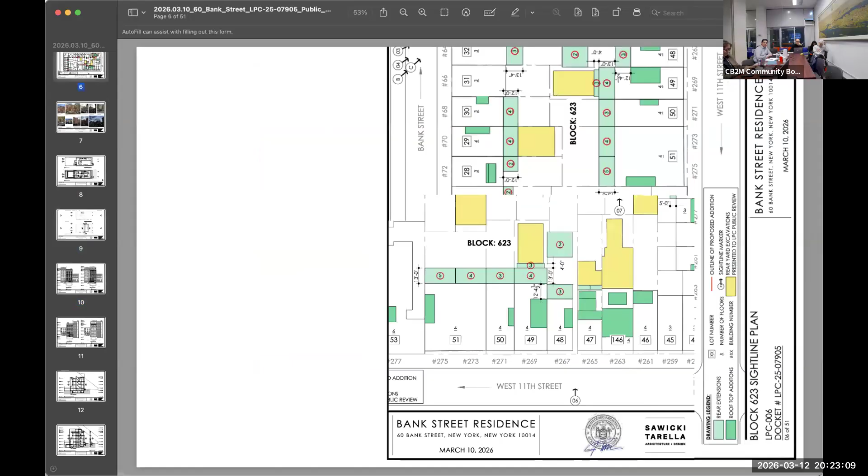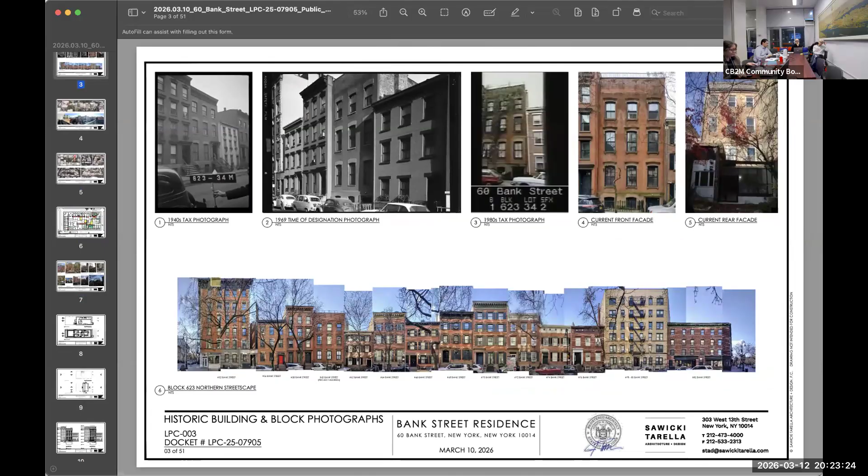Is it just the angle, or is there actually more space in the left-hand side than in the right-hand side? Well, it could be very deceptive. It could be that in the historic photo, that cornice is a little bit taller, but we don't have a dimension on it, so it's only a general proportion. It actually looks so from just glancing at it, even with 2 perspectives. Brian, are you suggesting that we should ask that it be moved up and made larger? Or that more effort be made to match the original? We are emphasizing that this new cornice be as close a replica to the original as possible.

But since we can't ascertain whether there was brick above the cornice on the original building, I'm wondering if we should maybe suggest that that be looked at again, to see why keep that extra brick up there when they're going to have a railing anyway. Not to decide, but might we say either a cornice that is larger and at the top of the existing brick, or remove the brick? I'd be okay with that. Okay, because what we want to end up with is not having brick above the cornice. Yeah, it doesn't look right to me. Right, that looks weird.

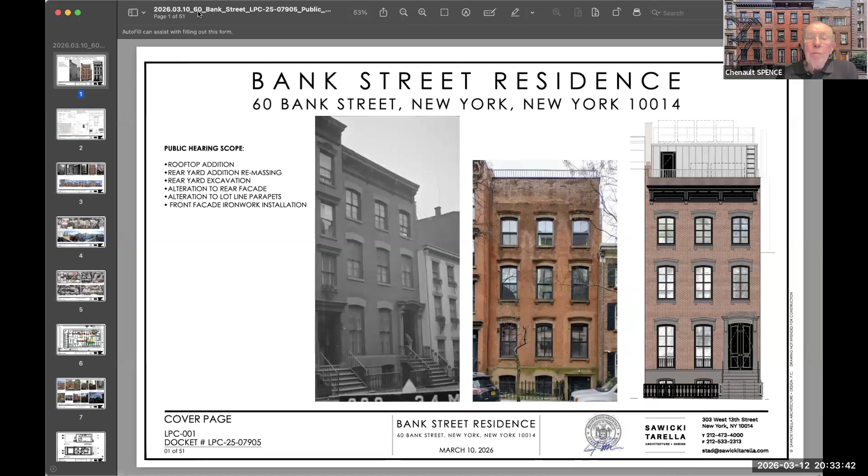Are there any other points of discussion? No. Any new business? We have only this meeting this month, and the news of the day is that the Thompson Street building is only going to be read into the record at the next commission meeting, and there'll be no public session for it, and that will be scheduled for later. However, the 4th Street building next door to the Merchant's House will be at the next commission meeting, as well as the Florent building. So whoever would like to come for that would be welcome.

And the 4th Street building has taken on an enormous number of people involved, and is going to be, I think, a lot of contentious testimony, and we'll see what the commission says. They were surprisingly hostile toward the Lafayette Street building and really called them to task on a number of things that were in our resolution.

Just to be clear, are you finishing your water? Or are you agreeing, Valerie? I was agreeing and finishing my water.

I was really surprised at how sympathetic they were to the historic ambiance. Yeah, and I'd say the first commissioner's commentary and questions really set the tone for the rest of the testimony. So I was there in person, and Chenault also testified on behalf of the board virtually. And Borough President Brad Hoylman-Sigal was there in person. I was sitting next to him, but it took a little bit of time to get going. It was towards the later part of the afternoon.